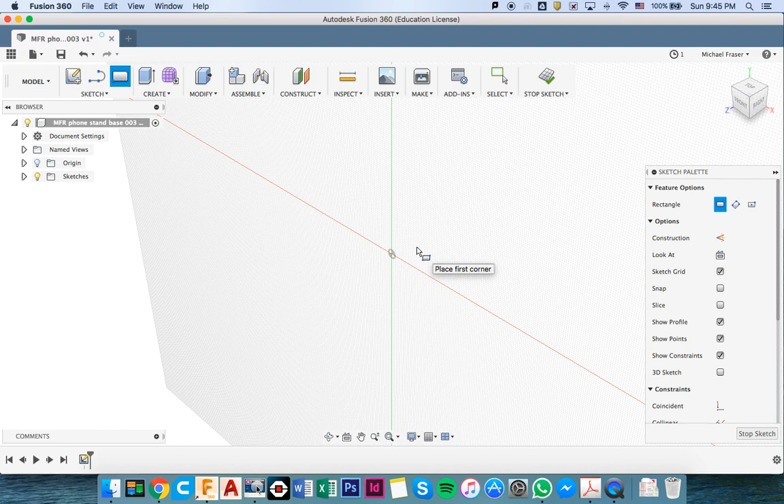But actually there's a shortcut for that, and I'm always going to try and teach you the shortcuts if I can. So I'm going to click on R for rectangle, and then I'm going to select this face. That's where I want to draw it. I'm going to click the first corner of the rectangle and drag. You can see there where it says 26, I actually want it to be 12.

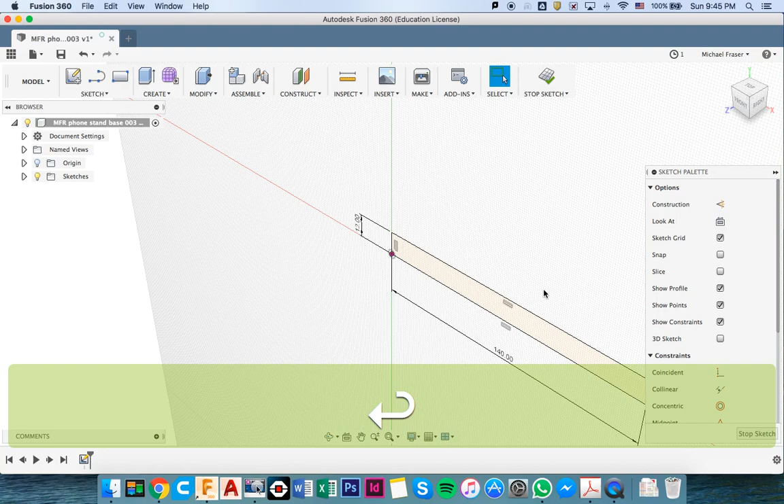So without clicking anywhere, I'm just typing 12 into the keyboard, and then pressing the Tab key, I'm going to change the other dimension to 140. That's the side profile of the base, and then press Enter to lock that down. I can use 2 fingers to scroll that into position, and I can click on the front here and it'll spin around, so I'm looking directly into it. Again, 2 fingers to scroll.

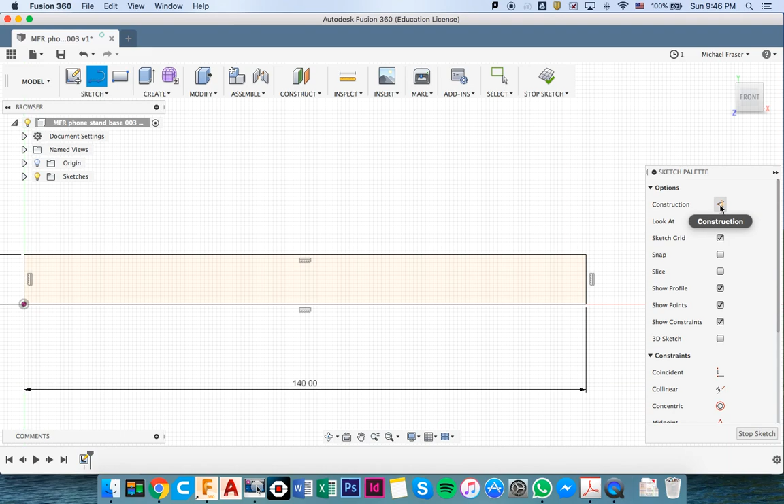Right, into here I need to cut a little, so I'm going to zoom, just pinch your fingers to zoom. I need to draw a rectangle on a diagonal that's going to be the area that's cut out for the upstand. So just to get the dimensions for that, I'm going to draw a line. It's going to be a construction line, and I'm going to click from here and drag that along, and again just typing 30 in there so I get exactly the right length, and then press Enter.

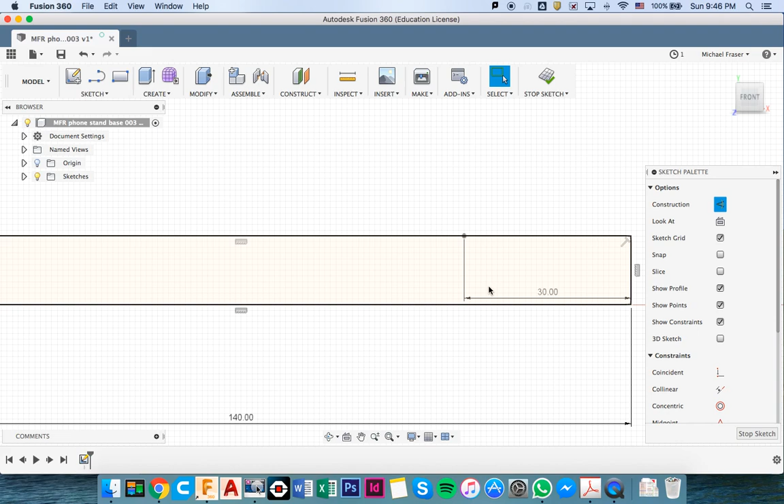You can see that's come up as a dotted line, which is great, rather than a solid line. That's a construction line when it's dotted. And now I need to draw in my rectangle, so again L for line, click and drag. I want that to go 8 millimeters down, and then Tab again for 70 degrees.

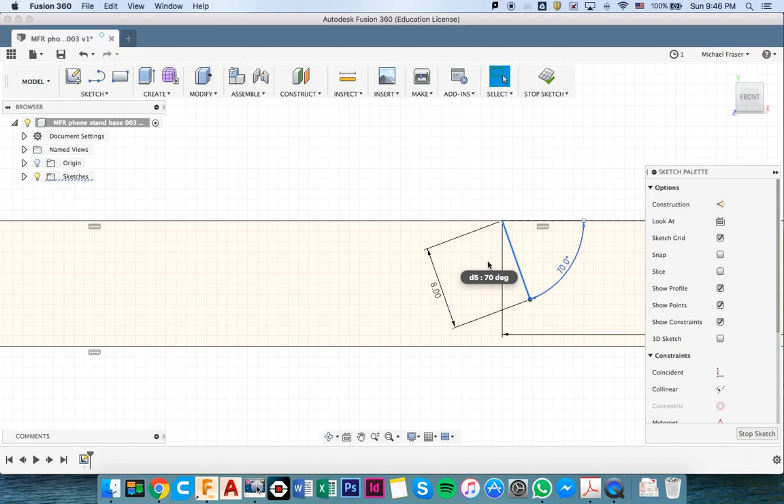Oh, now I need to change that from a construction line, so I can just click on it and unclick construction. I'm going to zoom in again, another line, L here, and that's going to be 3 millimeters wide, and then L again, and that should go to there. Oh, we're still getting construction lines, let's get rid of them.

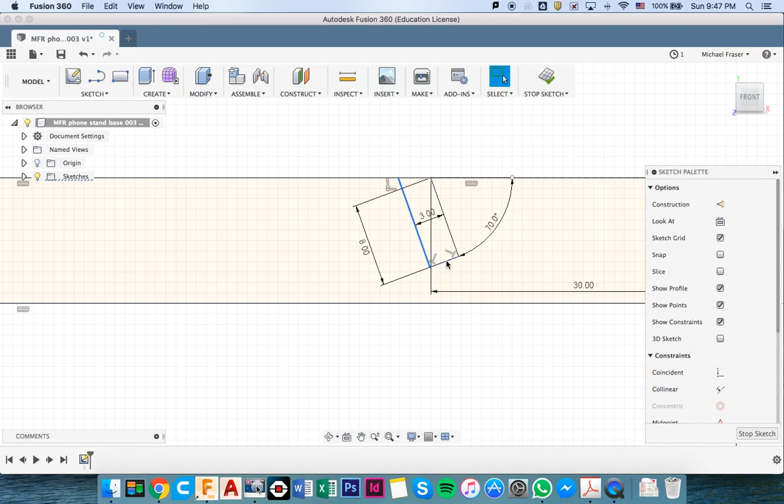Click on that line and unclick construction. It must be down here too. Right. Now, see, this is looking good. I'll just delete out these dimensions because they're kind of getting in the way a bit.

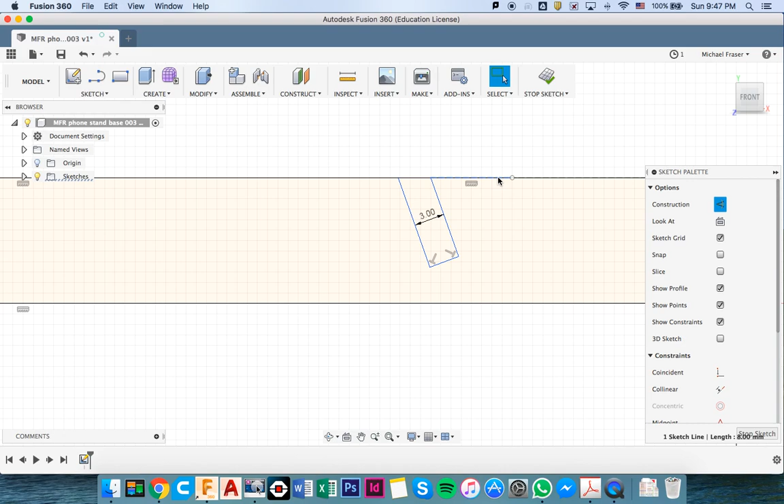I can delete out that 30 millimeter construction line. There it is. Delete that one out because I don't need that anymore. And then the last thing I want to do is trim out this little piece in here. So I'm going to use the T for trim and then trim that out. Again, pinching to zoom. And I'm going to go back to the home view, which looks like that.

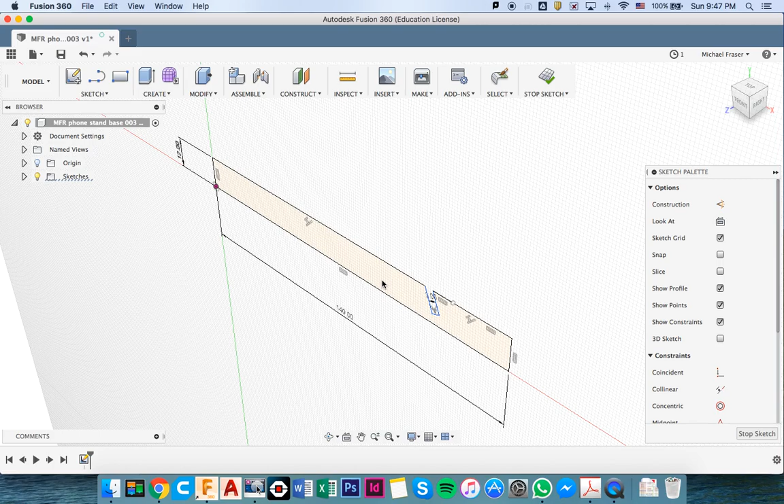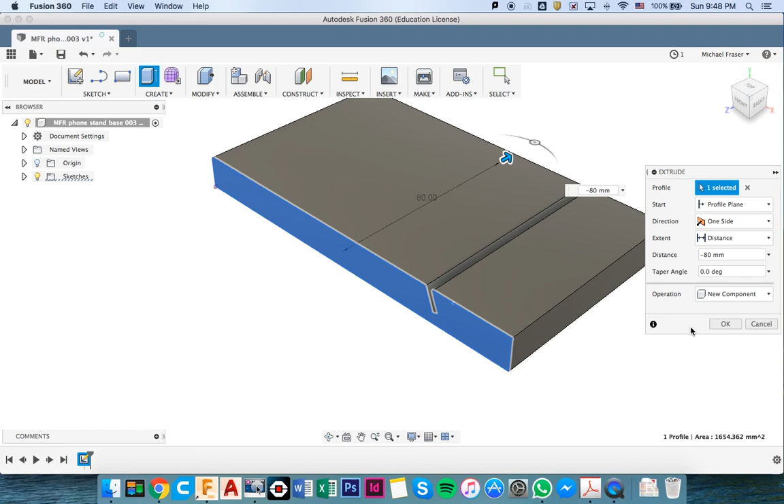And now I'm going to extrude out the width of this. You can use the create menu here and go extrude, or the shortcut is E, so just E for extrude. Click on that face, and I'm going to extrude it 80 millimeters. You can see it's brought up negative here, so let's go negative 80. And as we do that, we'll make that into a new component rather than a new body, and then we're going to click OK.

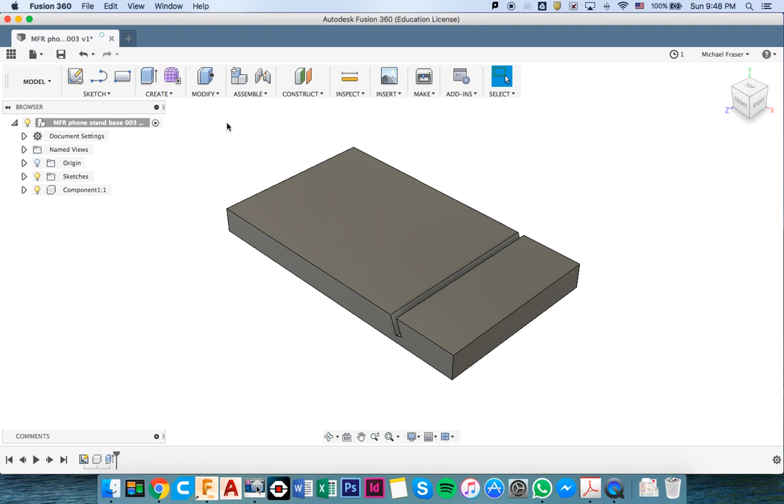So you can just have a bit of a scroll around there and have a look at the shape. That's the basic shape of the piece of wood that we're going to supply you, and that's the basic drawing that you need to do. You might make a few modifications to this. One of those is to put some fillets. Now, a fillet is a curve on an edge, so it's under here, modify fillet. Again, the shortcut is F, so let's click on F.

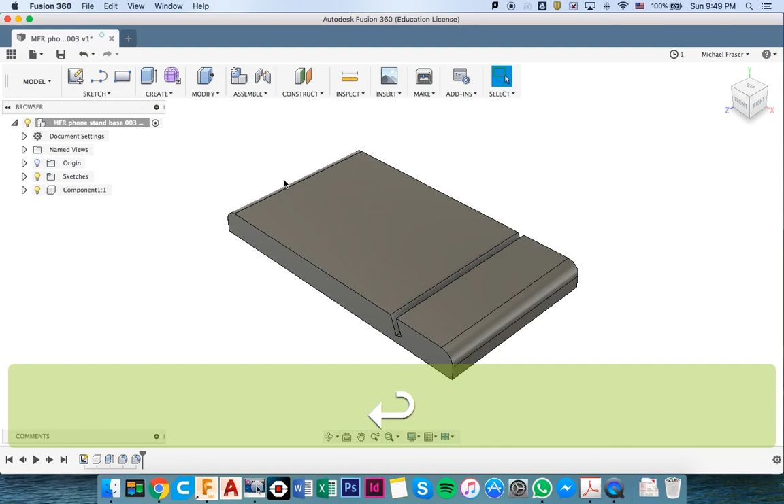If we click on that face there, you can drag a fillet like this, but I guess the most common way to do that is to type a size in. So because that was 12 millimeters, let's put a 6 millimeter fillet in there, and we'll put one on the back edge as well, 6 again. Now along these edges here, I'd like to put a fillet there, but it doesn't need to be so curved. I think it would detract from the overall shape.

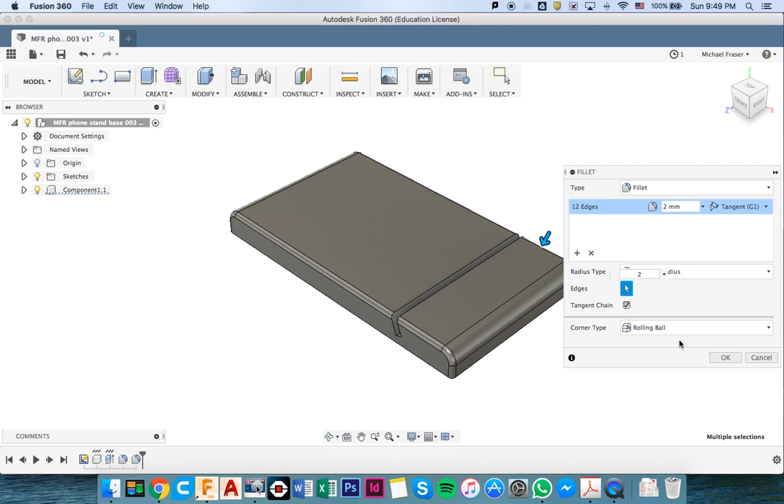So just click on F. This is really nice how it selects around that curve as well. So you can select all 12 edges that you want to fillet, and then let's try 1 millimeter, 2 millimeters. Yeah, that 2 millimeters looks quite nice. So let's leave it like that. So that's the fillets added to the drawing. And before we go, let's just save.

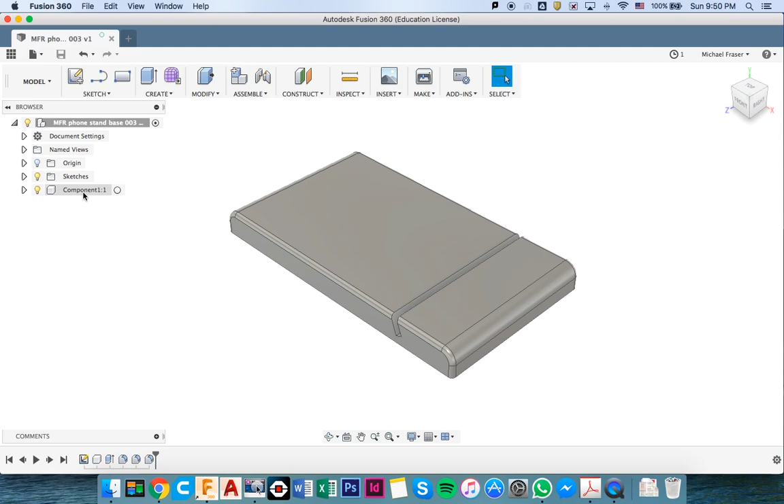One thing that would be nice to do to this drawing is to change the material. At the moment it's just drawn out of a standard material, but if we two-finger click on here, on the component, we've got 2 choices here, the physical material and the appearance. So let's click on physical material, and it's going to bring up a list of options. We're going to click on wood.

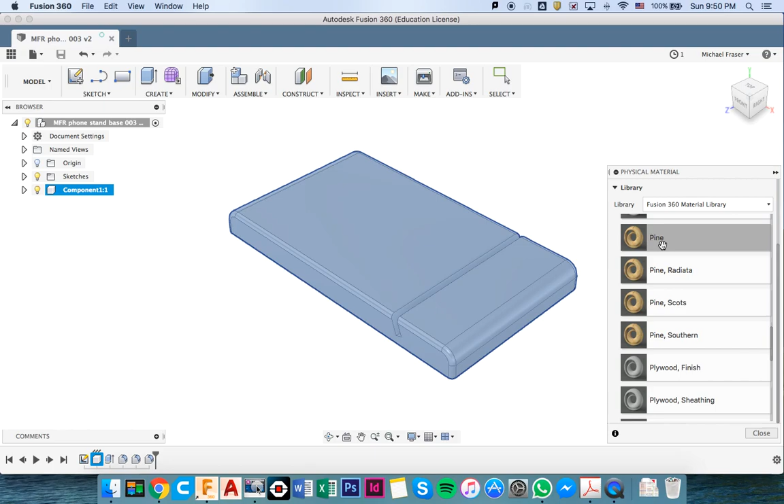Possibly down here we'll get an option for bamboo. No. So let's go with just a plain pine. It's a similar color. Obviously the texture is going to be slightly different, but if we click on pine, we drag that onto that surface, and you can see it's rendered it up with the pine grain on it as well, which makes it look really cool. Right, so that drawing's finished.

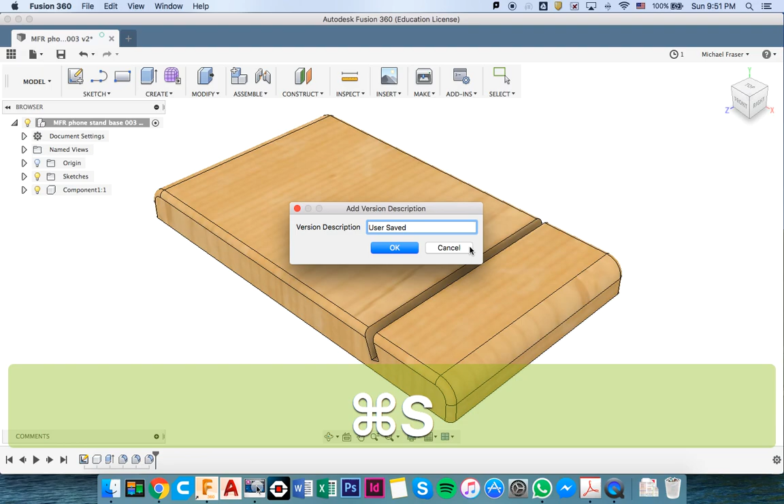Let's save that. Okay, you might want to have a play with the fillets and a little bit more of a play around to see if you can modify that so that it meets your needs a bit more.